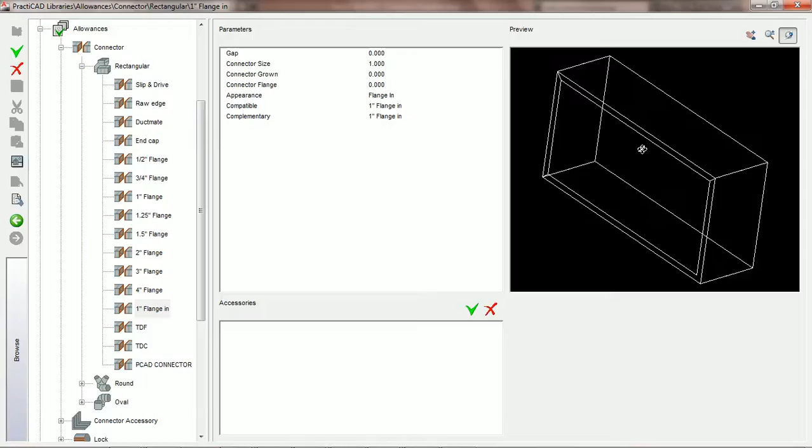And then what we're going to do is look at the 1-inch flange connector we have over here on the left. And you can see by rotating this connection, this connector has the same appearance, flange in, and it's got the connector size 1 inch. Now the difference between these 2 connectors, from using connector size with the appearance flange in, or just using the connector flange parameter, is if we go to snap a grill or air device to this fitting, once again, the neck is going to snap to the outer dimension, which is where my cursor is at this moment.

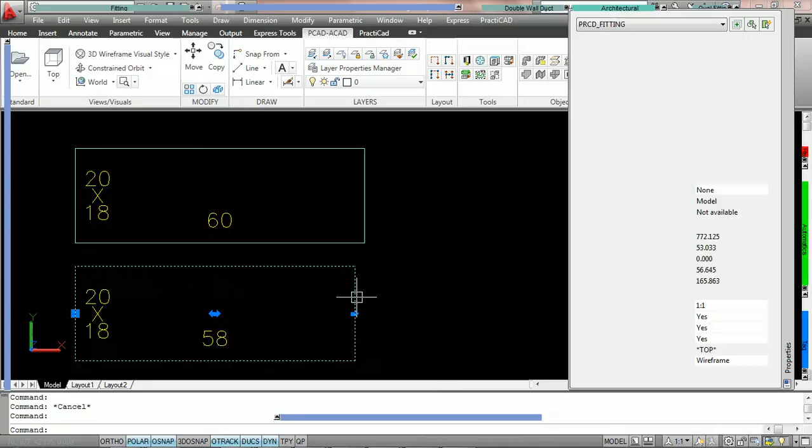So to demonstrate this, we're going to exit out of my library. What we have on the drawing are 2 pieces of duct. The first piece of duct, if we click on it, you can see that the connector is PCAD connector for the in and the out. That is the connector we designed with the 2-inch connector flange. The second piece of duct on the drawing we're going to click on, you can see this duct was placed with a 1-inch flange in on the connector in and connector out.

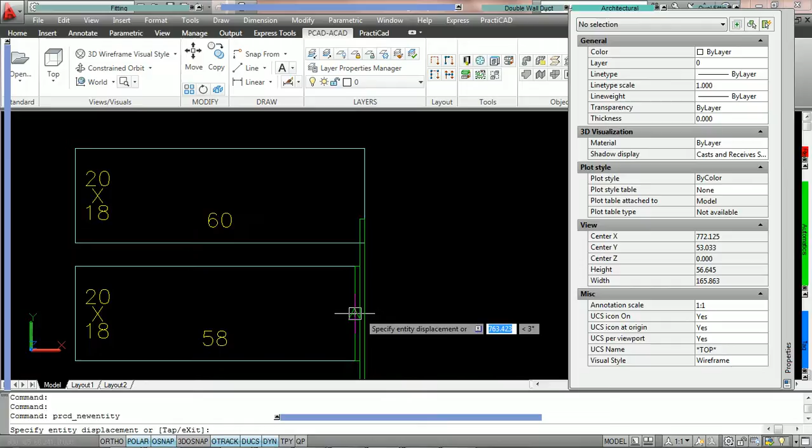Now what we're going to do here is basically grab out of our architectural bin one of our sidewall grills. And we go over tutorials on designing sidewall grills. And we're going to click on it and we're going to snap first to the 1-inch flange in. Notice when we click on that duct that the neck attaches perfectly and flush with the connector. And now what we're going to do is change the face by changing our length and width deltas. And what we've got here is a grill neck that is 20 by 18. It has snapped to the duct, but it did snap to the outside of the duct. It met the duct's walls.

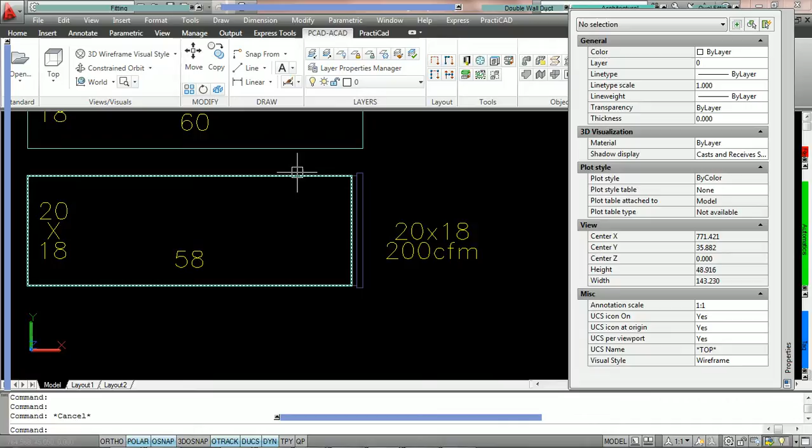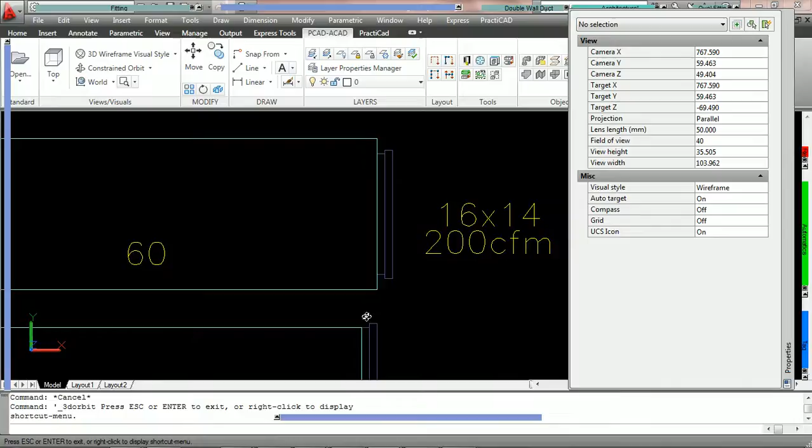Now what we're going to do is come over here to where we've got the PCAD connector. We're going to grab the same sidewall grill. We're going to snap, and then we're going to change the length and width parameters, and this has nothing to do with the tutorial on the connector flange. But notice that when we snap to this duct, PractiCAD is not snapping to the outer walls. What it's doing, if we put this in orbit, is it is actually snapping to the inside flange, or the connector flange. Notice here that on the one on the left, if you zoom in, you do have an inside flange appearance. But you can see if you follow this blue line that it's actually attaching the grill to the outer walls of the duct.

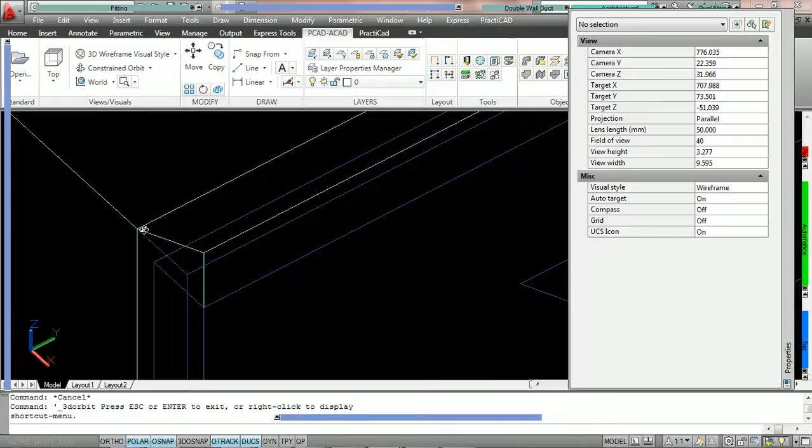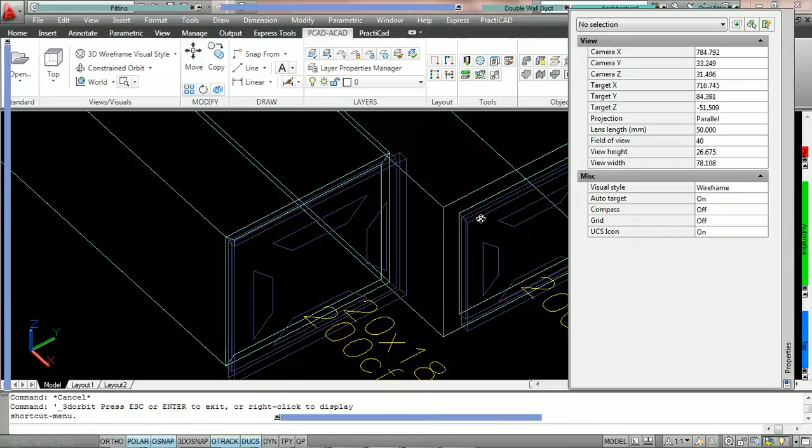However, with the connector flange parameter, when you snap a grill, it snaps the neck to the inside of the connector flange. Now this flange, regardless of how large or small you make the value, has no bearing on the length of the fitting. So you can see that this fitting here is 60 inches, the one with the PCAD connector on it. The one we did the 1-inch flange in, we made the connector size 1 inch, so we lost an inch on each side of the fitting to create this connector. So all the connector flange parameter really does is it gives us a value to create a lip at which we can snap PractiCAD grills and air devices to. It is a parameter with a very specific purpose.